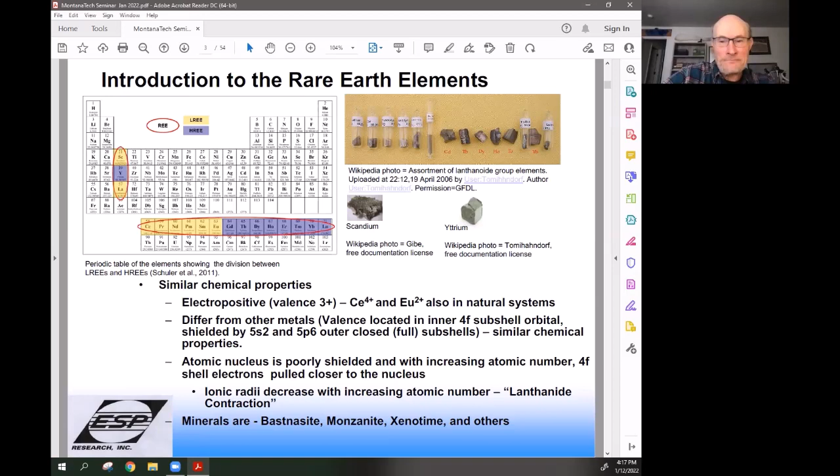They are relatively abundant in the world. Cerium is like the 25th most abundant in the crust of the world. They are very scattered all over the place. They're rare because they seldom occur in pure form. And the alchemists are still part of our world. They called them an earth because you could not really dissolve them in an acid, so they couldn't get them apart to characterize them. So some of the name goes all the way back to the world of alchemy. Next.

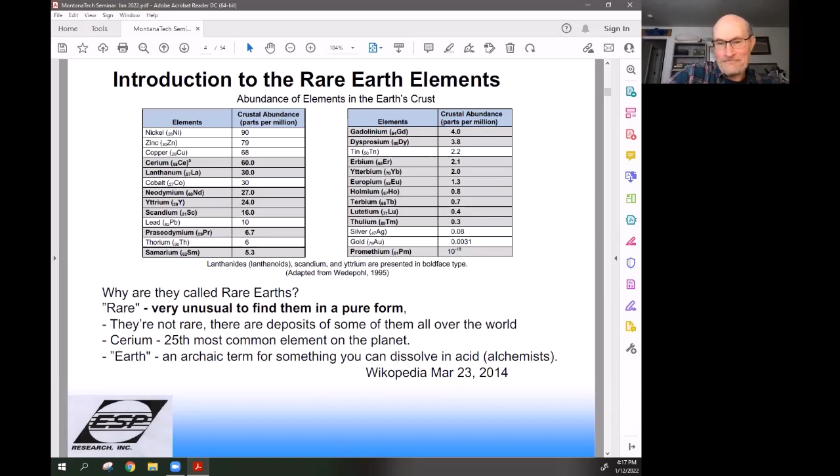They're all over the place. And in this map, which is the 2021 USGS map, showing all critical materials as they define them, you'll have to look for those kind of maroon colored squares. You'll see some here in Alaska. You'll also see some running down the West Coast. You'll see some scattered around the middle part of North America, and then you'll see them all over the rest of the world, and especially heavily distributed in both Russia and China and in Australia.

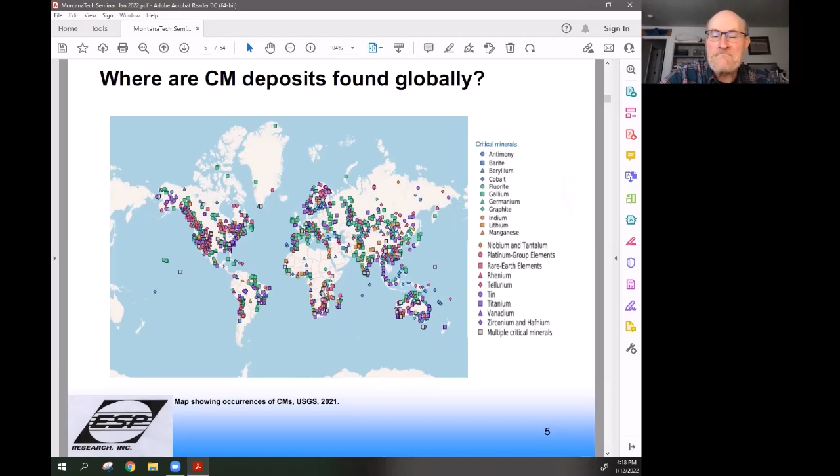In the US, we can be a little more specific. You see them dispersed pretty near to you guys, over in the Lemhi Pass area, Diamond Creek, just north of Salmon, Idaho, and down in southeastern Idaho there's a patch of them. And then you look over in Wyoming, the Bear Lodge deposit near Devil's Tower. The biggest one and most active, and the only mine in the world for quite a while that was active, is Mountain Pass. It's now reactivated and they're producing oxides at a pretty high level. They've set records for production this past year.

They create a concentrate, which we'll talk about a little later on, that goes on to China where it's processed into metals. But you look at it, they're scattered all over the country. Pea Ridge is an iron mine out in the middle of Missouri, and that's a place where they're trying to get going. They've got some permit issues, but they're coming online. And then even on the East Coast, there's a few deposits that look likely.

They tend to be primarily in the carbonatite and the phosphate type of materials, but we'll also see examples of other types. Here in Alaska, we have a number of them. There's one called Bokan Mountain, which is getting close to coming online, and as we'll see shortly, they have a relatively high concentration of material there.

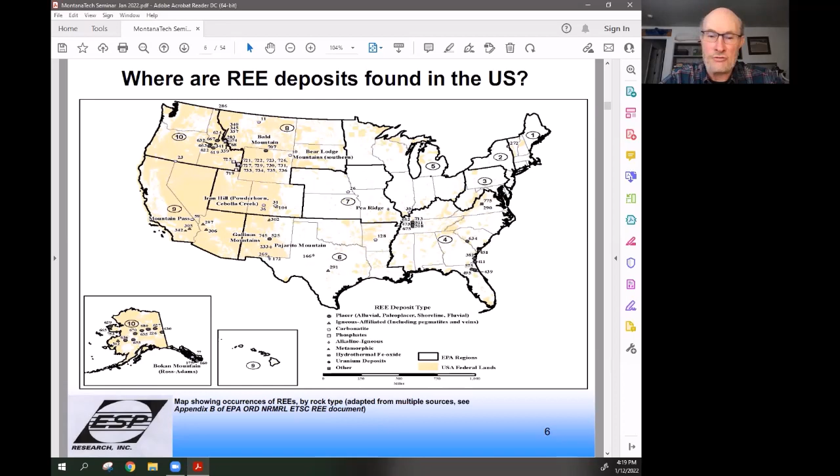So looking at different resources, let's look at some examples. Bayan Obo is in Inner Mongolia in China, one of the primary deposits that China extracts from. It's an iron mine, and it's a carbonatite type of material. You'll see this is heavy in what we call the lights. The left-hand half of the lanthanides are called lights. On the right are the heavies. And you'll see that deposit is pretty heavy in the light materials and less heavy in the heavies. However, what's interesting is basically you have a cerium mine in almost all these cases. Then you extract all the minor components out of that after you get the cerium out.

Mountain Pass, California, is very similar to what you see at Bayan Obo. At Bear Lodge, we see a drop in the amount of lanthanum and an increase in the amount of neodymium. While if we go on to Bokan Mountain here in Alaska, you'll see a significant drop in the light rare earths and a significant increase in the amount of heavies. So that makes it a lot more valuable. We want the heavies because they are used in things like magnets where high temperature stability is required.

And then we look at the southern China clay deposits, which are simply ions adsorbed onto a clay material that they desorb very easily. You'll see a large amount of heavies and a sudden decrease in the amount of the lights. So your processing has to be considered very carefully in terms of what you're going to do in order to isolate and purify these things once you get to the separations phase.

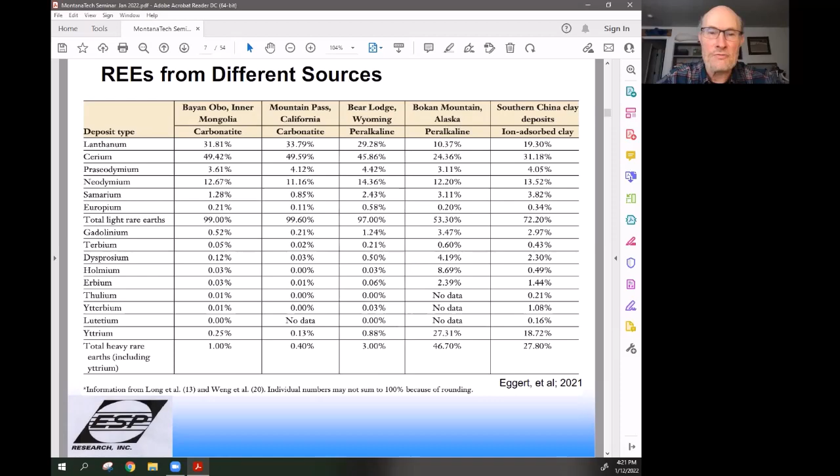Why are we so interested in these things? We look at the 2010 markets of metals, and this is a very broad metal market. We have a $518 billion market in metals that include things like iron, copper, gold, nickel, zinc, the platinum groups, manganese, lead, and even bauxite. And you get a feel, okay, those are huge markets. And all of a sudden we look at how much the rare earths take up in the metals market. It's less than 1%. It's 0.15% of the total market. But they're valuable to us because they give us stability in our magnets, they give us stability in metals, and they are useful in a lot of other applications we'll talk about.

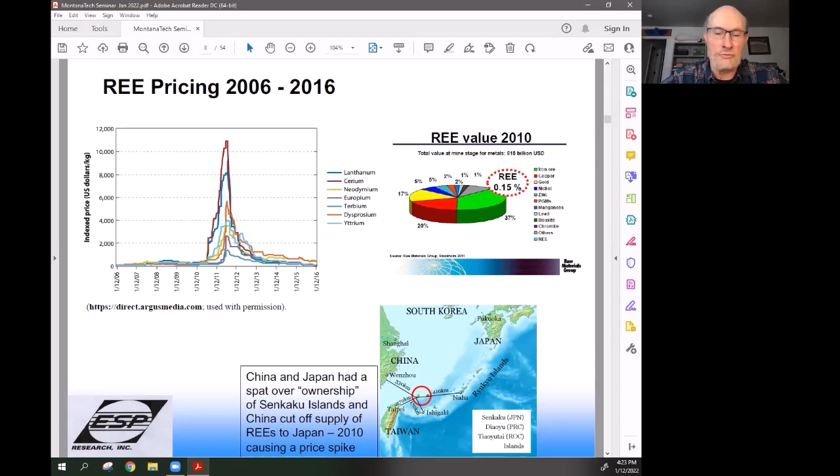What really stimulated all of this interest is in 2009-10, the Chinese and the Japanese had a little problem around some islands that are virtually just rocks out in the middle of nowhere that each are claiming. A couple of fishermen were out there fishing, and the Chinese didn't like that, and they took the fishermen captive for a few days and cut off the supplies of these materials to the Japanese. And of course, that affected their electronics market very heavily. So they had a little spat there, and we got a price hike that was tremendous for all of us. And so the interest in these things and trying to stabilize our resources throughout our country has been a big deal, and that's why we're so focused on them.

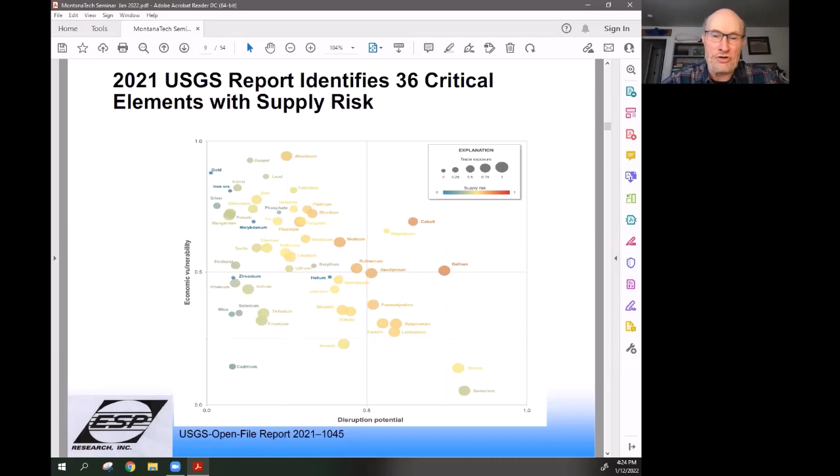It's an interesting set of studies they've done here that give us a feel for where we're at with these materials. And if you're further up and right even, it's important to think about that because you start to be feeling very exposed. For example, molybdenum is fairly exposed, and that's primarily because it's vulnerable due to economic issues as opposed to disruption potential. Go ahead with the next slide, please.

We also need to look at these markets in terms of their use in production. Let's look at production first. I think we summarized that a little bit, but China produces the vast majority of this material, and they use it primarily. Now, when they say they use it, that means they're producing higher valued, value-added products, i.e. metals, that are then used by other producers around the world.

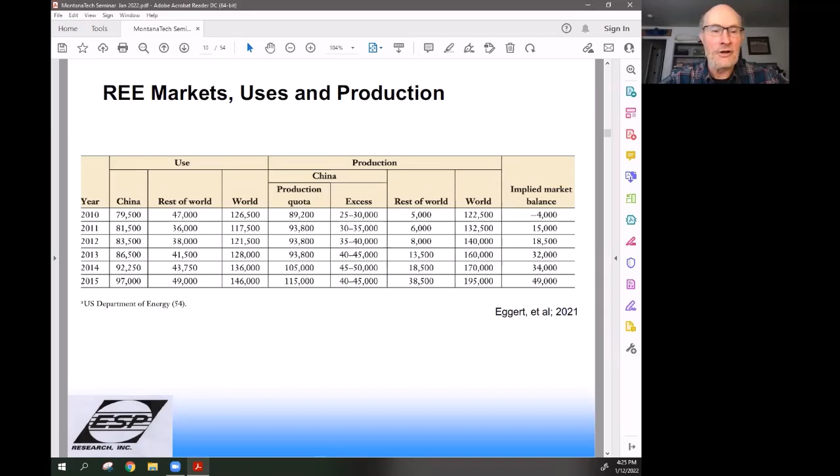So, for example, they'll produce a bunch of metal, which will then go somewhere else in the world to be turned into magnets. Although at this point in time, that example doesn't hold because they produce most of the magnets too. So they've gotten themselves controlling the value chain all the way up and down. We'll talk more about that in a few minutes. Next, please.

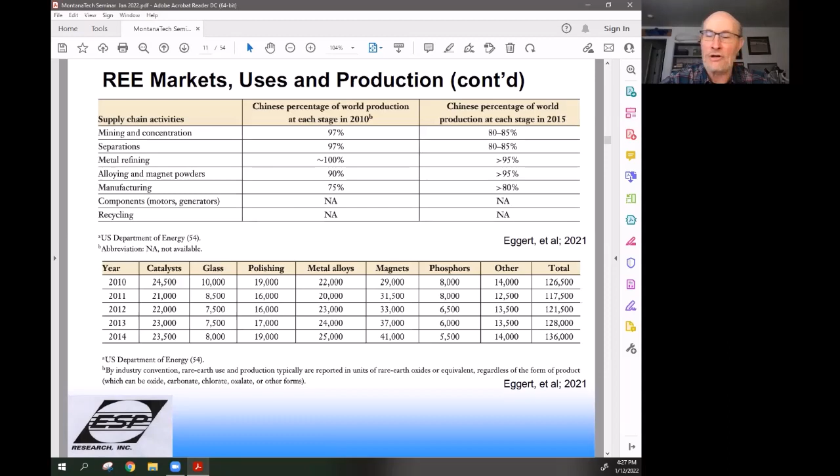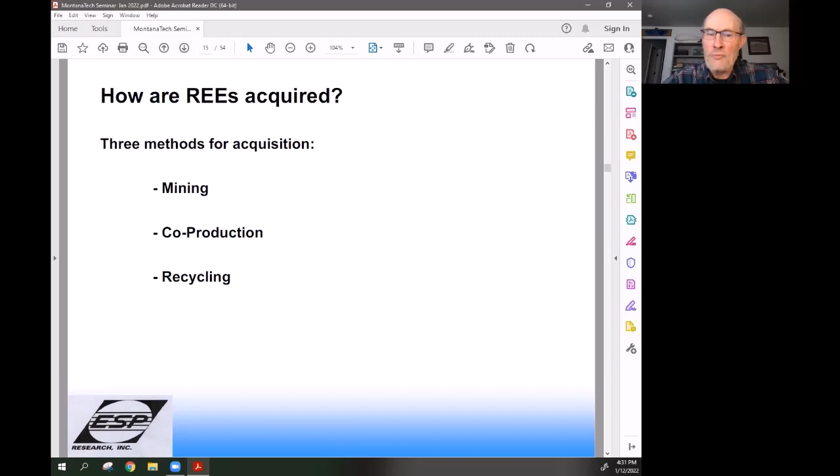Next, please. I want to talk a little bit first about the mill and mining aspect of it. So we acquire these things in three methods. We mine them, we co-produce them, or we recycle them. We'll talk about mining first. In terms of mining, there's some exploration you have to do. And once you have done the exploration, you have to evaluate the characteristics of a deposit. You have to then transition that into understanding the geology, and going from the geology, you have to then go into engineering of those systems to make them run and make them work.

You are, of course, doing economic evaluations to determine if it is mineable and if it's valuable to you at that point. And once you've gotten that part of it and it looks reasonable, you might go ahead and mine it. You have to develop that mine. And that process, in a very broad brushstroke sense, requires understanding what the investment is going to be for milling, what you're going to do to build other infrastructure up, how you're going to dig the hole, and finally, what are the facilities and other activities that have to take place there, and if you can get enough investment to do all of that. Next, please.

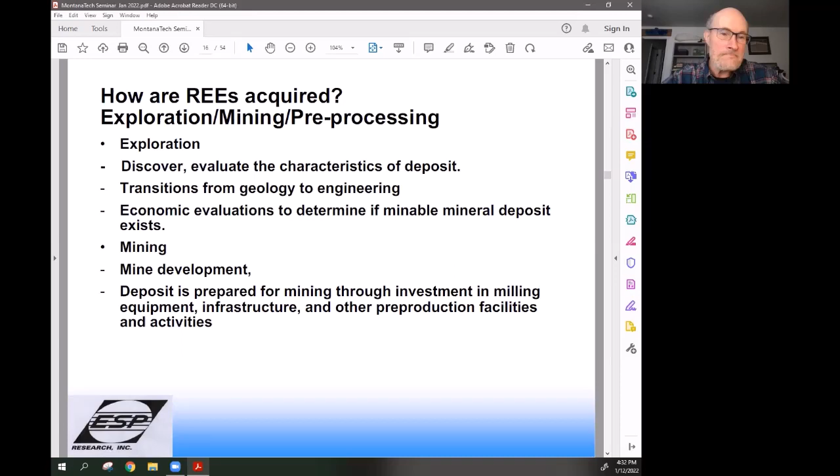So in terms of mining and milling operations, well, at the mine level, you have to figure out whether it's going to be surface or underground operations. And of course, these things have all sorts of activities associated with them in terms of what do you do with your tailings? What do you do with impounding? How do you process them? And what are you going to process? What are you going to do at the mine site versus the mill site?

Typically, mines will have a mill affiliated with them, and then the separation work often is done elsewhere. So you create a concentrate. In the mining world, you have to get the overburden and waste rock away from the place, and then you have ore that can be fairly rich, up to 13% by weight or more of rare earths. And then the tailings, in some cases, are 0.5% and maybe up to 3%. What's interesting at Mountain Pass is that their old tailings are 8 to 10% in rare earths. That's what they threw away.

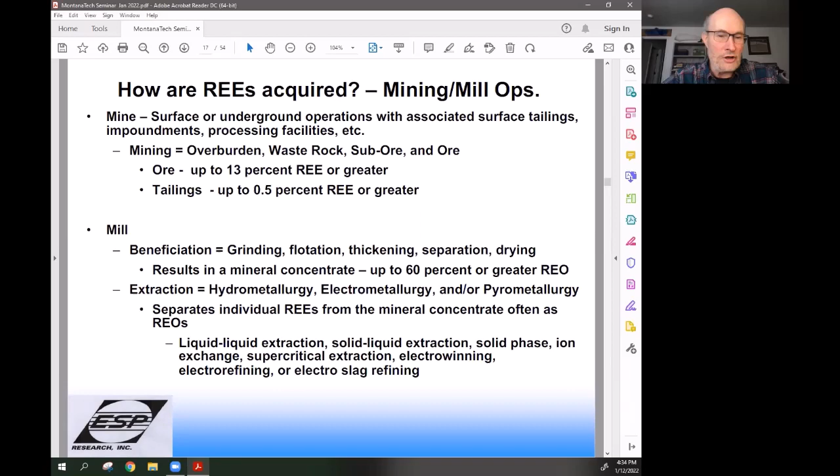And the balance of the rare earths they pulled out, they tend to be around 18 to 20% in their concentrations. At the mill level, that's where the process of beneficiation takes place. We tend to do things like grinding and floating and thickening, and then doing some preliminary separations from the gangue material, and then we dry it. And you end up with a concentrate that's anywhere from 60 to 90% in rare earth oxide concentration. And then we go into the extraction process, which will come later in the separations area. And we'll talk about that a little later. Go ahead, next.

Co-production is another way we acquire these things. So when we mine aluminum, we get gallium. And that's what this little chart shows, in this sense of what are the co-products when you mine. In copper mining, we get a lot of PGMs and other metals that come out of that. In fact, there was a joke at least a number of years ago when I talked to some friends at the Berkeley pit that they mined copper. Copper paid for the mining, and then the platinum groups, gold, and other elements that came out of it were the profits.

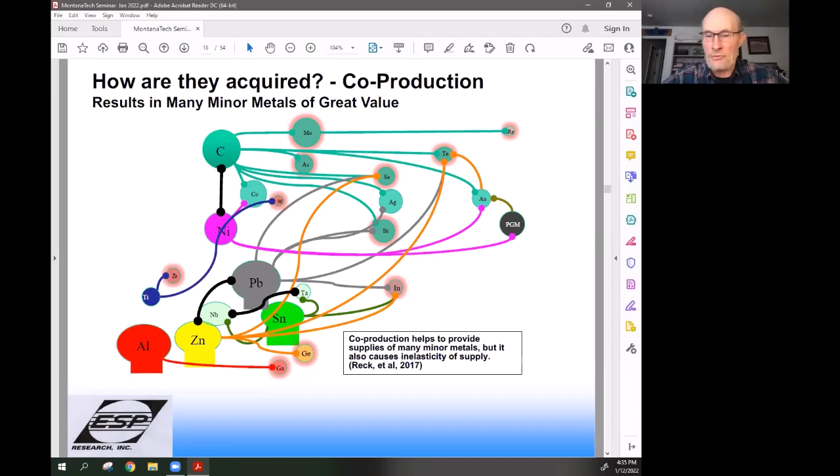So we tie these things together, and we begin to understand that there's a real intricate tie between metal making of various sorts. And also, as I've indicated, if the primary, such as aluminum, decreases, the secondaries decrease. And so you might end up with a shortage of gallium just by accident, because that's where our primary source is today. Next, please.

In the world of recycling, that's another way to get them. We can bring them back in out of our current devices where we've invested them already. Let's bring them back and reuse them again. The trick, though, and that's the biggest problem we have here, is how do you collect them? And having worked a fair amount in the area of recycling over the last couple of decades, it's really intriguing how hard it is to pull these materials back. People don't want to have to take the effort to take their cell phone and drop it off somewhere. They just throw it in the drawer of their desk and kind of forget about them.

However, today we're starting to see a little bit better opportunity for collection, and people are starting to come around that we can unload these things and reuse them. The trick, once you've got it collected, you've got to dismantle, pre-process, which generally is physical separation of these materials. And today we do things like manual disassembly. We reuse what we can. We remanufacture them if they can be. And then the balance of the material is shredded and ground up.

And in doing that, we have concerns about things like hazardous substances like lead, mercury, and other flammable materials, plus the flame retardant materials. There are some ozone depleting substances that come out of this. You need to consider how to capture them. And then one of the really big items in the recycling world is the fact that almost everything has a lithium-ion battery buried in it somewhere. And when you're shredding, you create a lot of dust, and these batteries tend to get shredded and then explode or burn. And you get fires pretty regularly in these plants. And they're a real challenge for the managers to run.

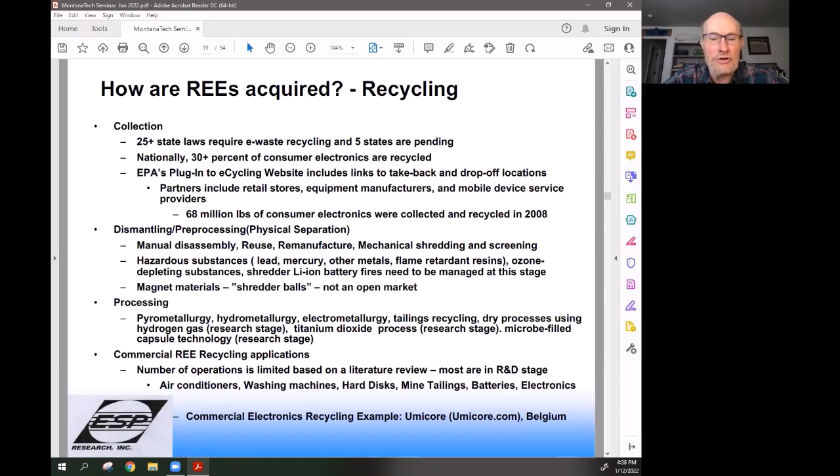There are examples of commercial rare earth recycling going on today. They're tied up with companies like Umicore out of Belgium. They recycle just about anything they can get that has electronics in it, pulling out the platinum group metals, gold, and silver. Then they take the slag off of that and sell it to a secondary company, also in Belgium, that recycles, purifies, and separates the rare earths for reapplication. So there is recycling going on, but it's very limited, and it's pretty hard to get done because of the cost.

One example, of course, is the cell phone, since we all hold one pretty much every day. The components include motors, the LCD screen, integrated circuits - all containing things like gold, platinum, palladium, silver, nickel, and rare earth elements. The average cell phone today in today's market is worth about $5 in terms of the metals in it.

The challenge remains: how do we get that collection system to come together? How do we get our social network to come together well enough that we can pull this off? How do we get enough collected so it's economic? And how do we get the extraction technologies to keep up with what's coming? These things are ever changing, so it's really difficult to set up a process that does just recycling of cell phones, because even they change, or electronics for that matter.

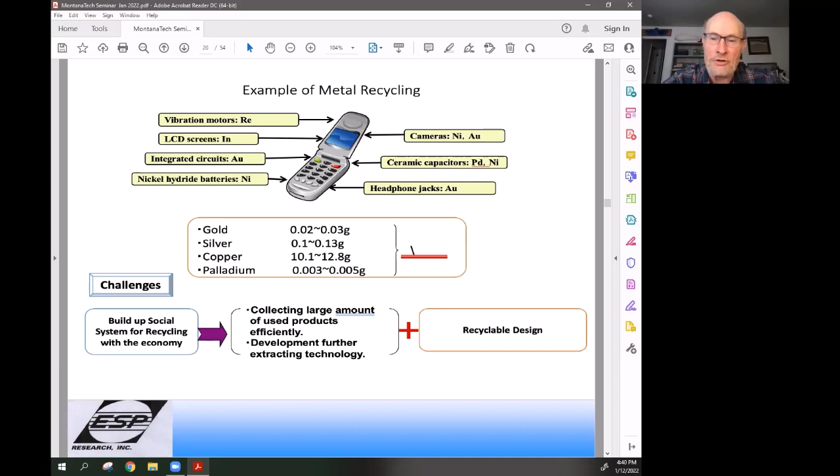So there's a big movement right now in both academic and some industrial circles to look at how to design these systems for recycling. Stay tuned for that - I think it's a really exciting topical area that's coming forward.

So let's talk a little bit about the processing side of this. We've gotten through exploration, mining, and pre-processing. Let's talk more about the details in processing, the separations, and even touch on metal making for a few minutes.

This slide feels a bit out of place - I think we've addressed most of what's in it, but I'll repeat a couple things. The ore grades come in from less than 1% to about 15% by weight at the time of mining, and you can have either open pit or underground mining. We concentrate through magnetic, gravimetric, and flotation approaches to get 50 to 70% rare earth content by weight for bastnaesite, which is a fluorocarbonate. Monazite is a phosphate mineral we tend not to process much lately, because it tends to contain more radioactive materials. And I indicate the 90% you find when you process the ion adsorption clays in China. These concentrates contain mixtures of all of the rare earth elements in the ore at that mine.

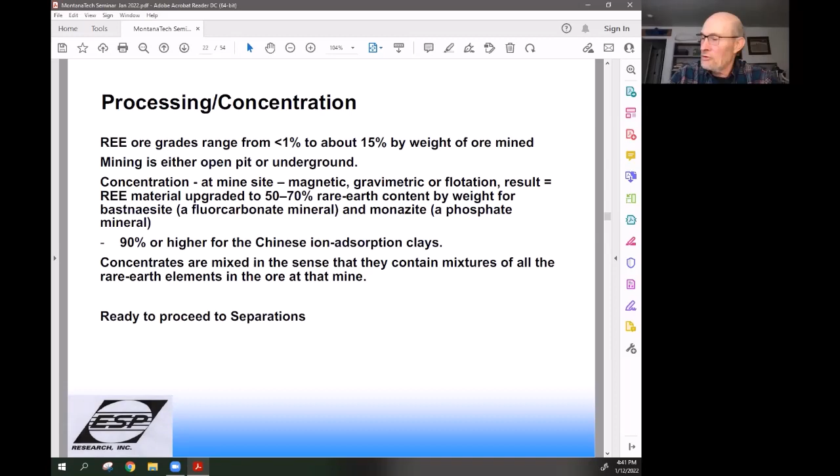So there's no real separation going on yet, but once you have the concentrate, you're ready to move on to separations. Here's the real key to where we're going in this talk - in the area of separations, these are the major methods used, though there are some others on the periphery.

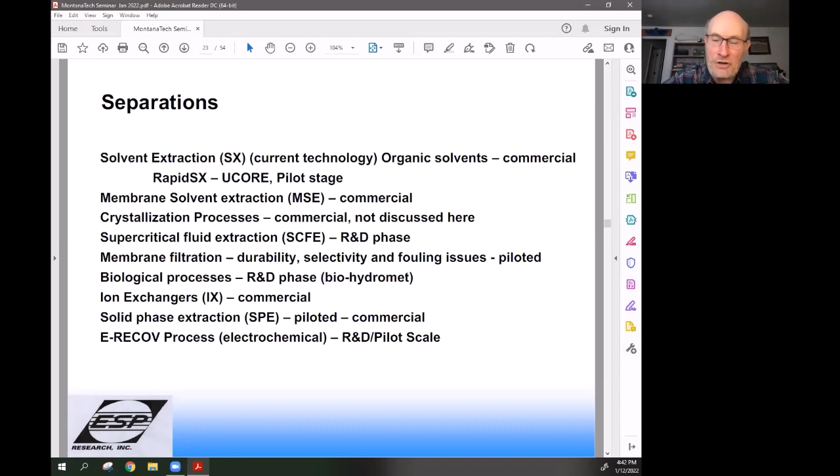There's solvent extraction, which we'll talk about. There's membrane solvent extraction, called MSX. There's crystallization processes - I'm not going to discuss those since they're used by some people. There's supercritical fluid extraction, primarily an R&D activity. Membrane filtration, we'll talk a little about that. There's biological processes, ion exchange processes, solid phase extraction - a few of you probably know as much as I do about that, since that's a Montana technology. And there's also the E-RECOV Process, which is new and just coming to bear today. So let's go ahead to the next slide.

As I talk about a couple of these things, several of them are related because they're tied to solvent extraction in some way, shape, or form, in the sense that we're chelating these elements, or binding them ionically. We're finding some way to grab them with some specificity. There are things like cation exchangers, which are primarily focused on carboxylic acids and/or phosphorus acids.

They're functionalized in different ways to make them soluble in different solvents. There are diethyl phosphorus acids that take part in that as well. There are chelating exchangers such as the beta diketonates that are pretty effective for doing the chelation. Then there are solvating extractants such as the phosphorus ester materials that solvate, basically grab them and solvate them based on their polarities. And then there are anion exchangers based on primary amines.

So as we go through this, we'll be able to talk a little bit about which species we're trying to get, and which of these specific items we'll use to do that.

In terms of separations, let's talk about solvent extraction first, or SX. It's been around for decades. We take these acidic solutions where we dissolve the material out of the ore or out of the concentrate, and then we use multiple mixer settlers to get these things to happen.

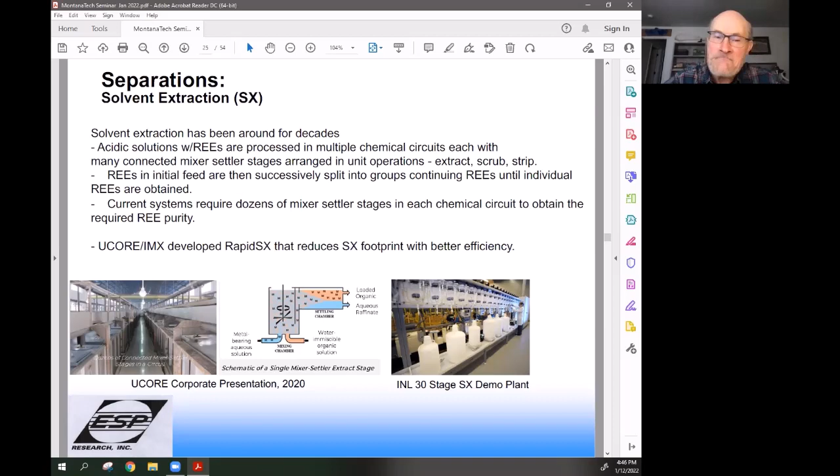This gives you a feeling for what solvent extraction looks like. We take it through in multiple stages. You do an initial split of the metals in the first stage, and this shows the way that folks at Mountain Pass, California do it.

You go from the mixture to lanthanum, cerium, and praseodymium, and lights and heavies—basically praseodymium, neodymium, and samarium. Then they do a second split using a slightly different chelating complex to drop it out into lanthanum, cerium, and cerium-praseodymium. Finally, we split out lanthanum, cerium, and praseodymium, and then neodymium and samarium, if you really want to go that far.

It's commonly done where you sell a couple of these basically as mixtures, because that's acceptable in the markets today and written into the specs of what magnet makers require. So you don't have to go to elements in all cases.

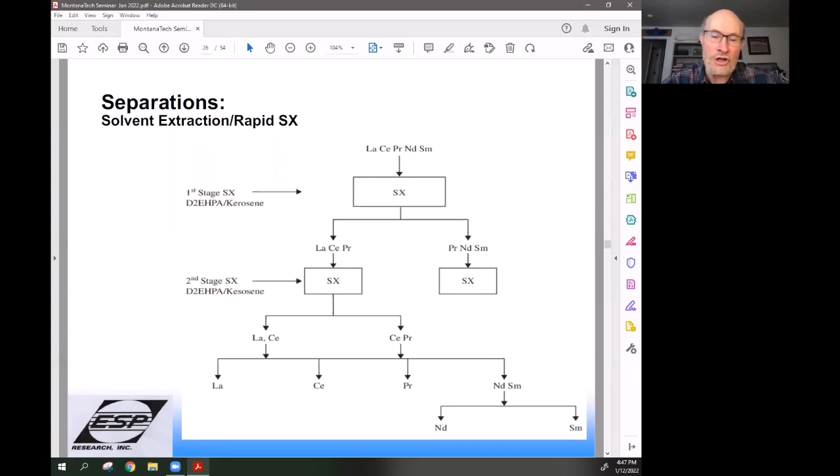Another way to approach this is membrane solvent extraction, by adding a porous membrane that contains the solvent extractant. You run your feed solution across that solvent extractant contained in the membrane, and run your stripper on the other side. Basically the solvent extractant becomes your transport medium for these elements, so you take a unit operation from a two-step process into a single-step process.

You're then able to recover the rare earths in much less time, much smaller spaces, and it's proven to be exceptionally efficient. That process has been developed and commercialized over the last 4 or 5 years by a company in collaboration with Oak Ridge in Tennessee.

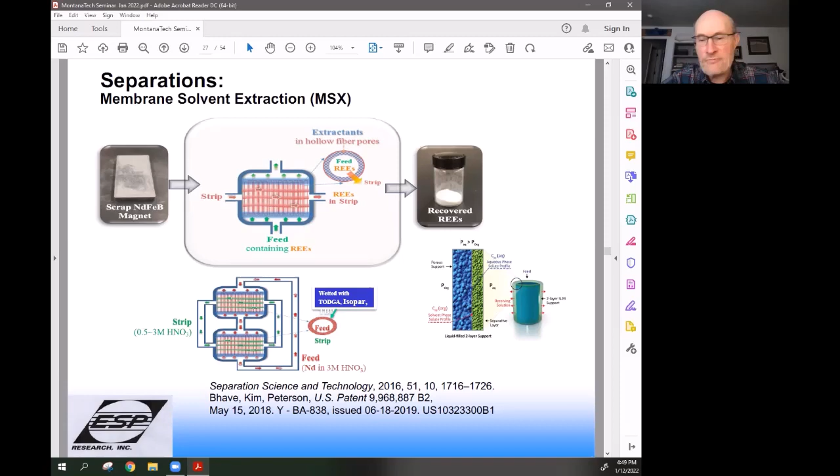You can hook these units up both in parallel and/or in series to give very efficient collection of material. Shown on the left, the current neodymium recovery, for example, is over 80%, and the kinetics are incredibly fast—we've achieved that in less than an hour coming to equilibrium, pushed up to 80-85% recovery. The kinetics of capture are very fast, shown in the diagrams, and on the far right you can see the release kinetics are pretty reasonable. So we get the materials in, across the membrane, and out pretty quickly.

These do require clean streams. You have to have a fairly well filtered stream before it goes in, so there aren't a lot of particulates hitting the membrane, for two reasons: one, particulates will get stuck on the membrane and foul it; two, if you're using high face velocities, which this requires, they'll tend to erode the surface of the membrane and destroy its selectivity and release the organic. So there are some tricks to how you run these, but they do work very efficiently.

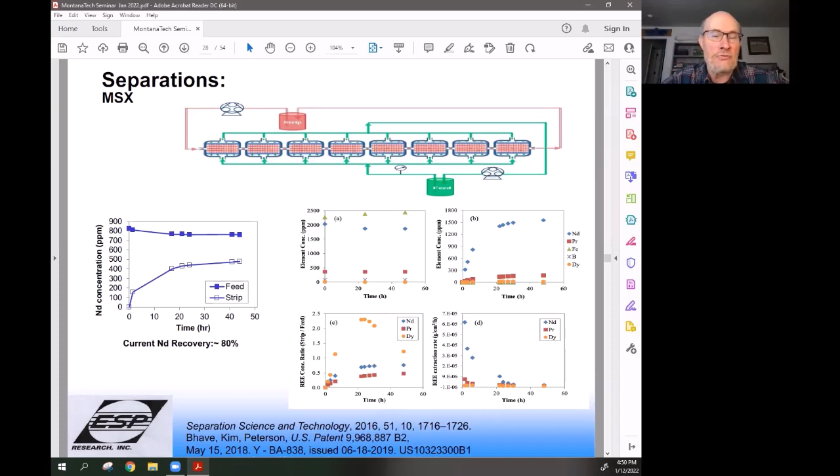This process is being licensed by a couple of different mining companies right now.

Supercritical fluids have also been used, or at least thought to be used, for these systems, and they've been tested at the bench level in several cases. For example, in nickel metal hydride batteries, after they've expired you dissolve them and supercritical fluid extract them with extractants normally used in solvent extraction, achieving a very similar result without the organic phase—you substitute the organic kerosene phase with supercritical fluid carbon dioxide.

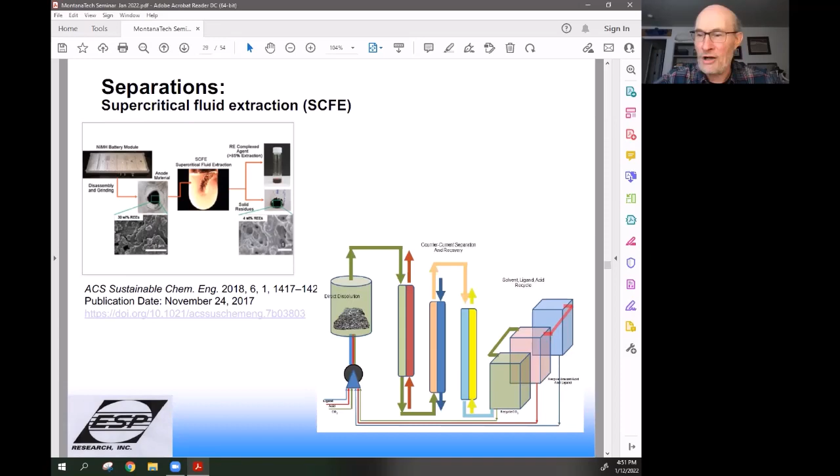Other standard membrane systems have been proposed and actively pursued over the last 50 years or so—I've been active in that area for at least 25 of them. Membrane processes, of course, involve pressure difference, electropotential, chemical potential, and temperature difference approaches.

They've been proposed for everything from water for flotation, pregnant liquors, concentration, pulling lithium from brines, pulling other metals from waste, and recovery of reagents and AMD—I don't remember what that stands for, I'm sorry. But all of these are potential uses of membranes.

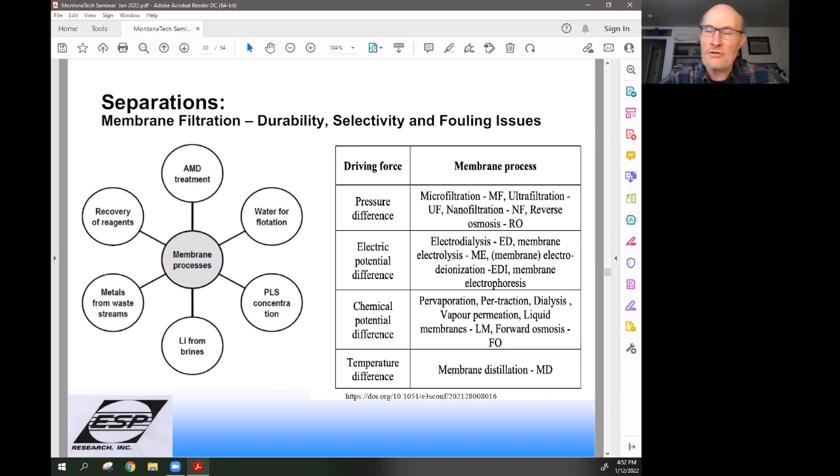Polymeric membranes tend to suffer from durability and selectivity maintenance and fouling issues, as I've indicated previously, so you need to think about that. Porous stainless steel and ceramic composites tend to be very effective in this field and have been used extensively—I'll be talking about them briefly here in a while. Let's see what the next slide says, and then let's talk about biological processes.

There's a lot of activity in this area for bioleaching, and we've been very successful in using biological processes to pull gold out of systems. They're doing it down in Nevada all the time today, as well as pulling other metals out of their bedrock process systems, where the microbes generate acids right at the surface.

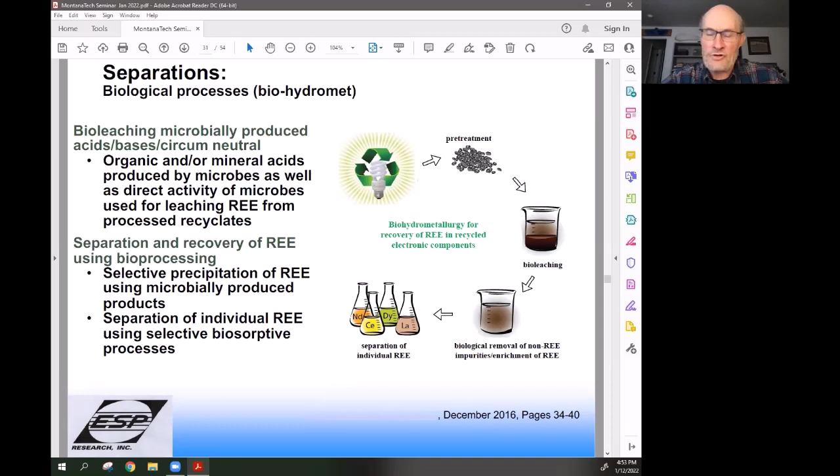The metal ions are mobilized, and then once you have the metal ions mobilized, you can capture them by other means. And then there's also been some effort to separate them using biological processes as well, by selective precipitation and/or separation of individual rare earths. And it's interesting to see what we can do. I'd say this is an up and coming technology, although it is implemented in some places. So it's something to keep watching. For the rare earths, it's still growing. Next.

The trick is that these swollen polymers are very sensitive to both thermal and pressure gradients, and they tend to compress with any major offsets. Using fractal distributors, you're able to get even pressures going in, even pressure coming out, and you can run huge amounts of fluids through them at very high flow rates and still get good capture of metal ions.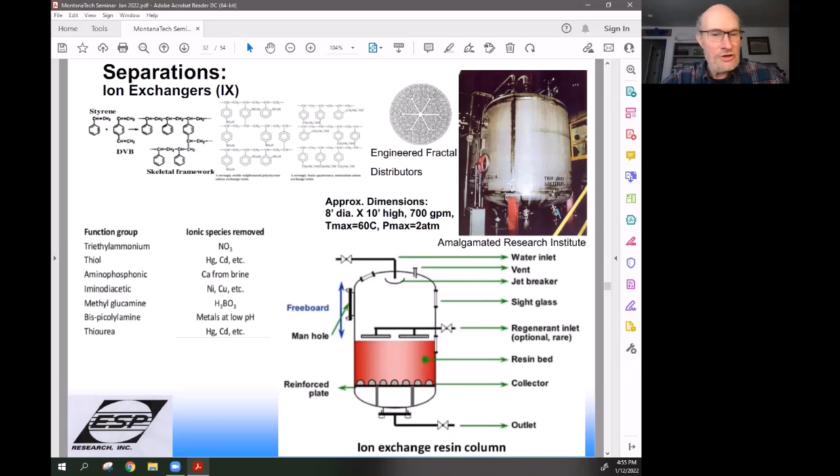So an alternative to that has been developed in a couple of different places, one of which is Rich Hammen with MetalsUS in Missoula, who has been very successful in developing the solid phase extractors, where we take the liquid extraction systems and stick them onto polymers, tie them onto surfaces, and start to work with capturing materials in chromatographic-like settings. This is a system that has worked well for him. He's demonstrated it, and I believe he has had a fair amount of success at selling it as an alternative to standard ion exchange.

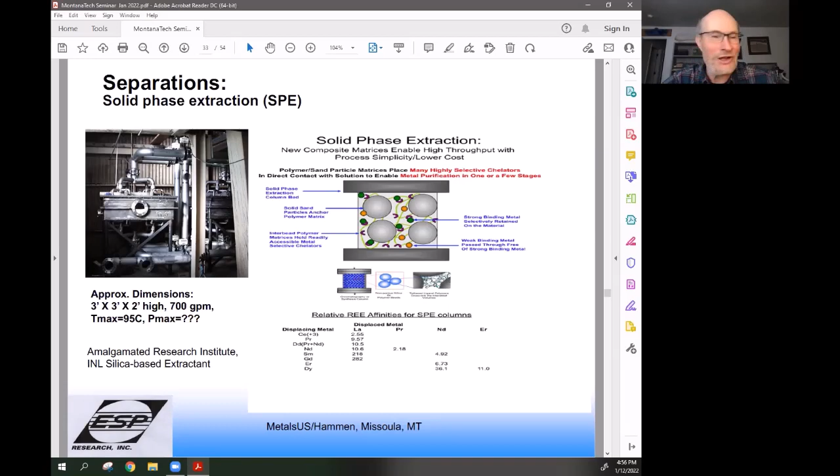A couple of folks have developed some other ways of doing this by sticking different ion exchanger-like systems directly onto the silica surface. And if you stick it on a silicate surface directly and covalently bond it there, you are then able to have much higher temperature stability and pressure stability in those systems. Shown here is an example of a beet juice softener. I'll show you in a moment. We took the tank from 8x10 down to 3x3. So it's pretty exciting. Next, please.

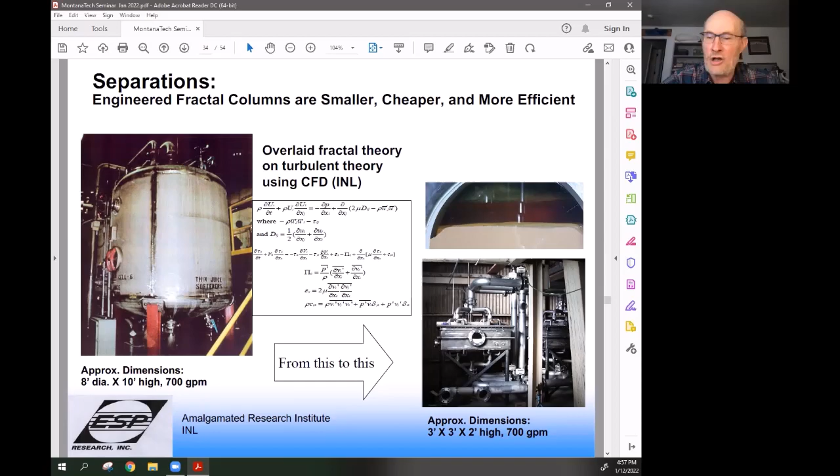It ran for at least 4 years that I know of. And last I knew it was still running with water at a temperature of 95 degrees centigrade. So it was accomplished where you could run very hot solutions and not have to cool them before you hit the ion exchangers. Next, please.

The E-RECOV process is a new process that has been developed recently for dissolving metals out of electronics and/or ore. Both have been demonstrated and piloted. Things like gold, silver, platinum, palladium, zinc, lead, nickel, and the rare earths. In the electrochemical cell, one has an oxidizer that they generate. So you're generating your oxidizer in situ. You're circulating that over a column of your rare earth and metal containing systems.

You allow that to corrode or dissolve your materials out, and you drop it into a tank where you have your recovery electrowinning process as the other half of your electrochemical cell, basically. And it has been remarkably successful and is currently licensed to industry.

We are able to recover approximately 90% of the metal content, and the costs and wastes are reduced because you don't have large chemical stocks sitting around because you're generating them in situ. And it has been carefully evaluated and is under the license process right now, I believe. So exciting. This is an exciting new step in this separation area. Next, please.

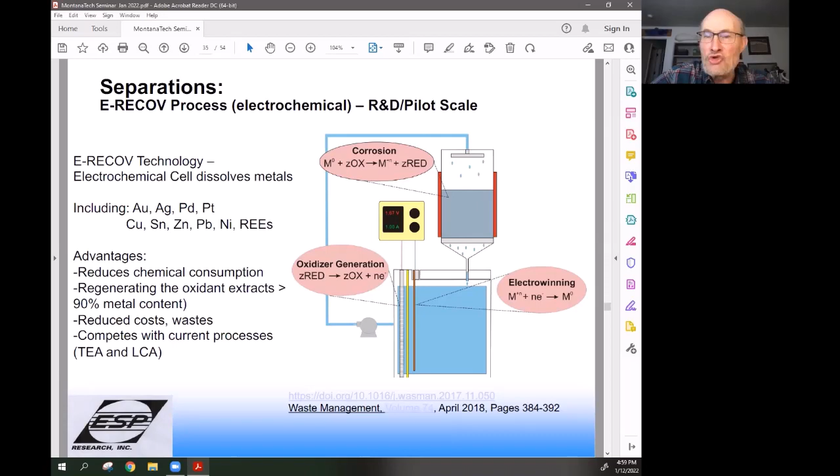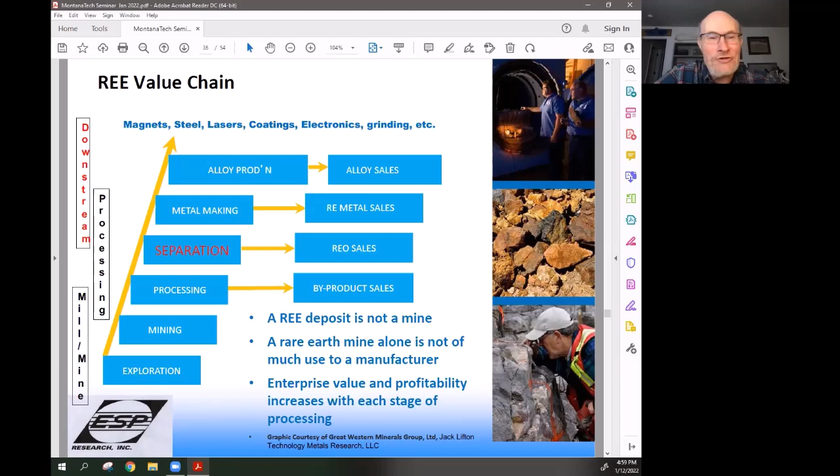So let's talk a little more about the downstream processes, and there's not much here. I'm going to keep it brief and fairly simple. So next, please. In the world of metal making, it really is the reduction of these oxides and halides to the metals. And there's of course smelting, which you all well know in Butte, in terms of metallothermic reduction, using either a furnace or various molten salt processes.

You can use oxygen, sulfide, and carbonates as your oxidants. And then what we tend to reduce is what we pull out of the separations process. They're either chlorides or fluorides. We can reduce oxides, but that's a little more expensive. There's fused salt electrolysis of rare earth chlorides or oxide fluoride mixtures, which is commonly used in China. It's dirty, but it works.

And then there's E-RECOV, which is an R&D 100 winner, as I've talked about earlier, and it has been demonstrated for this purpose as well. One of the newest areas in research being worked on today is doing electroreduction in ionic liquids. And it's really interesting: as long as you keep your ionic liquid scrupulously dry, you can actually do the electrowinning of the metals directly out of the solutions. So it's a big step if we can make it happen, and it's a pretty exciting research effort that's ongoing today.

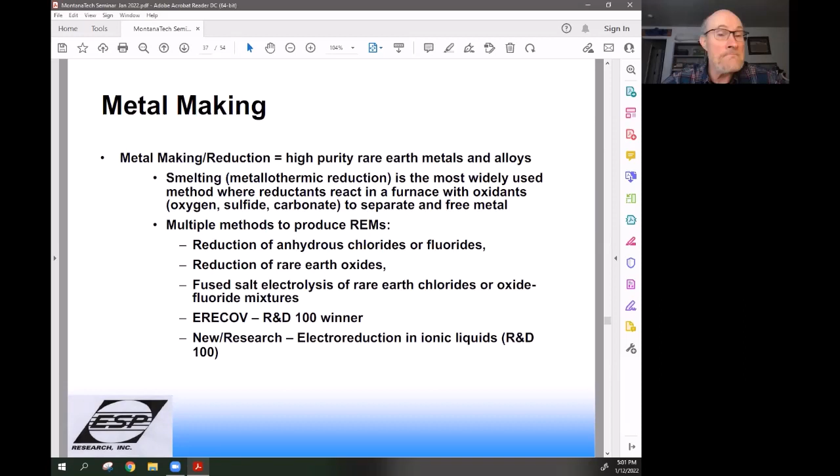Next, please. In terms of alloy production, alloys are interesting things to produce. I didn't put much there because I think you all know how to make alloys. What I did say is, how do we fabricate these things? Well, we can forge them, roll them, extrude them, we can put them into sand casting, die casting, all sorts of different ways of casting them. And then there's also a lot of powder metallurgy in these systems. In fact, a lot of magnet making is powder metallurgy today. It's not really within the scope of this conversation, but it's something that we do, and it's interesting. Next, please.

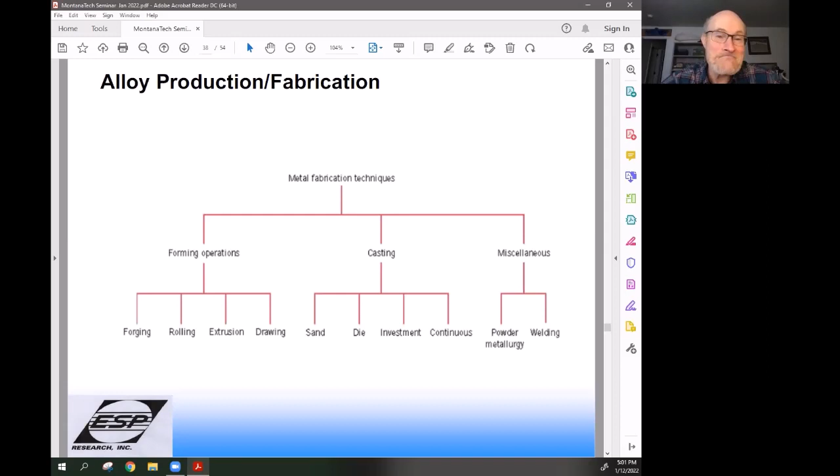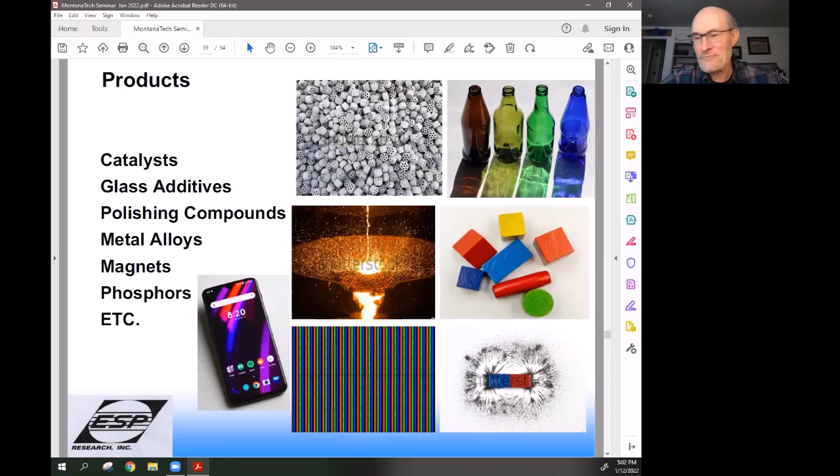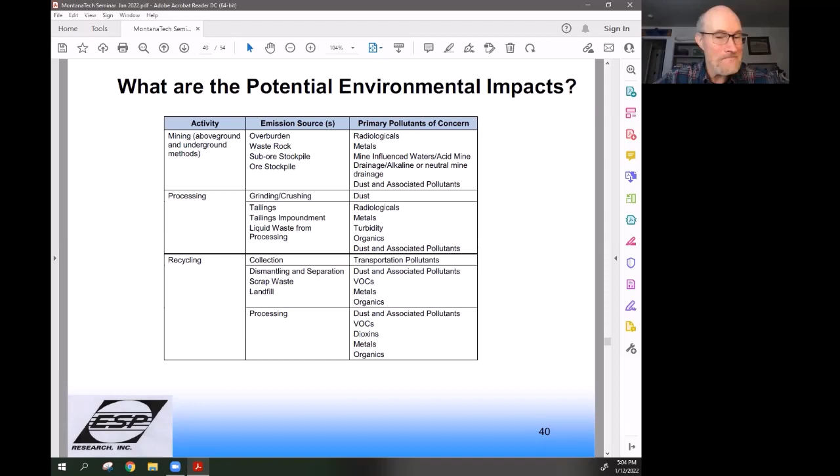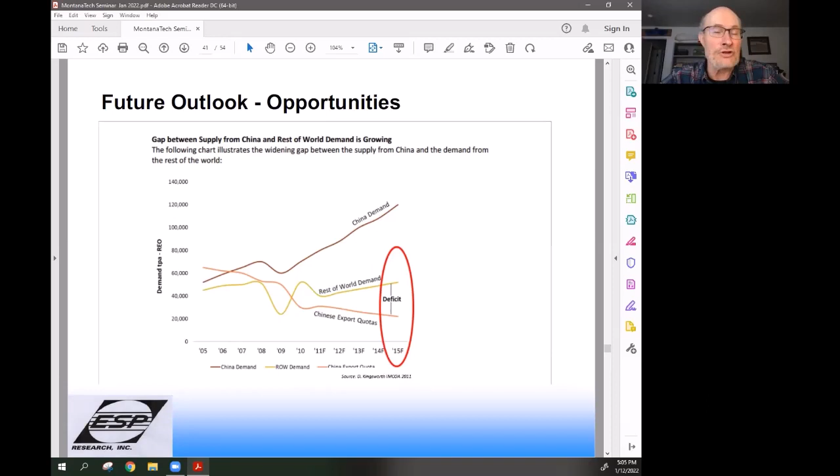Let's talk briefly about what resources are coming online, and that'll help to explain what we see coming. Mount Weld in Australia just came online about a year ago and is running at full power. Mountain Pass, California is back up and running. So there are two big resources for the world that are coming. Ucore is getting ready to build its processing facility in Ketchikan, Alaska. And they're getting ready to open up Bokan Mountain. That's misspelled, B-O-K-A-N.

And then the U.S. Rare Earth in Arizona is in process of developing their mine. Rare Element Resources in the Bear Lodge of Wyoming are in the process of looking at mine development. The U.S. Rare Earth is also in Wyoming. They're doing some mine development. The Western Rare Earths guys in Arizona have a mine in process of being developed and a new process for processing the systems. Again, it has solvent extraction in it, so it's a derivative thereof.

There's a group outside of Montreal that have got a project under development, and it's basically an old iron mine. There's a group named Wilbur Land and Cattle Company in Oregon that are working in volcanic tuffs right by I-5. It's about like a mile off of I-5, and they're up and running. They're processing material. They're basically a gravel pit, but they've got relatively high content of rare earths and some other elements in their system that they're trying to develop, but they're processing materials and already selling concentrates.

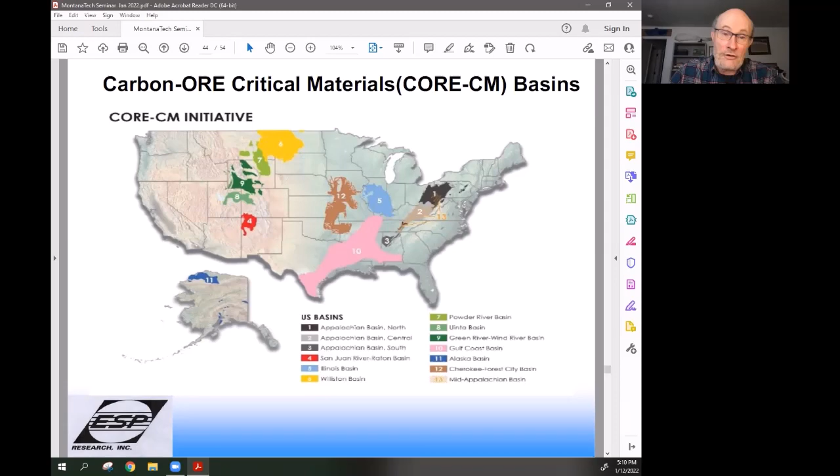The University of Alaska has the Alaska Basin, and that's a combination of University of Alaska Fairbanks and Anchorage working together with a bunch of industrial partners to generate a technical innovation center for working on Alaska-based coal. Next, please. This is your turn to ask me and grill me all you want. Thanks a lot for your time.

Thank you, Eric. I'll open it up to questions, and please unmute and ask away. Ooh. Lots of questions, huh? Rick, go for it. Hello, Eric. Thanks for the talk. I just had a question. I guess I'm more pulling your thoughts on it more than anything.

So MP Mountain Pass, they just signed an agreement to produce magnets for General Motors. GM, yeah. Do you have any thoughts on that? Talking about bringing the supply chain back to the US and thoughts on success of that or anything?